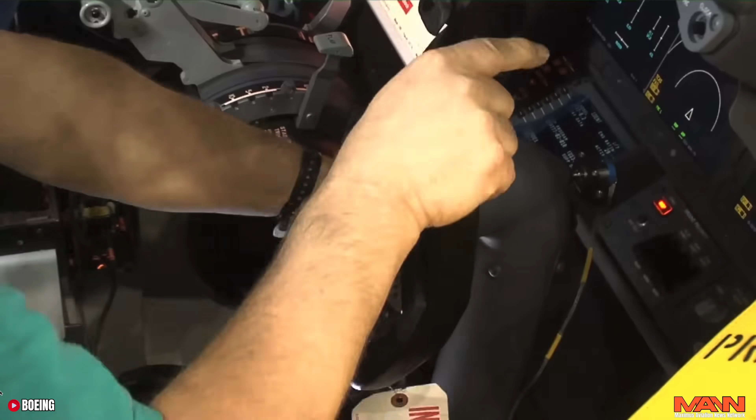So as some of you may or may not have heard, back in February of this year, a United Airlines Boeing Frankenmax Flight 1539, flying from the Bahamas to Newark, had just touched down and began its rollout at about 130 knots or 150 miles per hour. In case you don't know, during landing and takeoff, the main way to steer an aircraft is with its rudders, as opposed to the ailerons via the yoke or side stick while in the air.

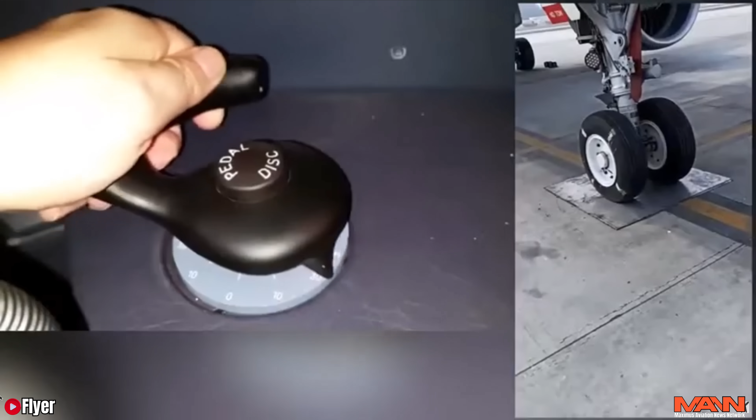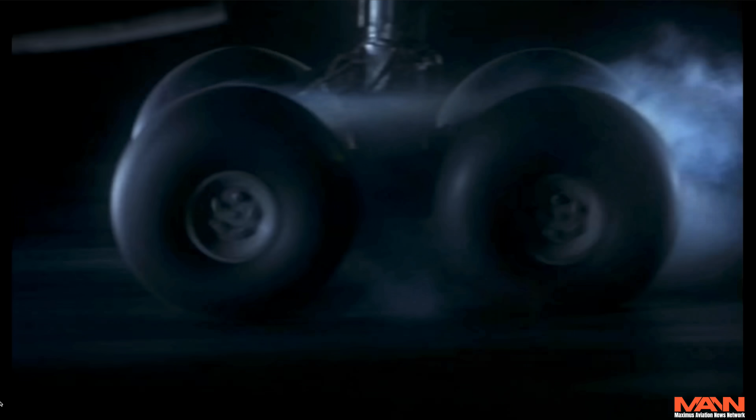But when the MAX pilot attempted to keep the center line during his landing and rollout, he tried to use the rudder foot pedals to move the rudder, but quickly found out that the pedals and the rudder were stuck. Thankfully, the incident didn't cause a serious problem because the captain was experienced enough to immediately grab the tiller, which is usually used to steer during taxiing on the ground, but in this case he used it to steer the jet as it was landing at high speed, and was able to keep the airplane near the center line of the runway for about 30 seconds after touchdown, at which point the pedals and rudder began to operate normally again. However, had this been a less experienced or aware pilot at those speeds, there could have been a serious accident. As a result, it prompted an NTSB investigation, and they released the preliminary report back in March of this year.

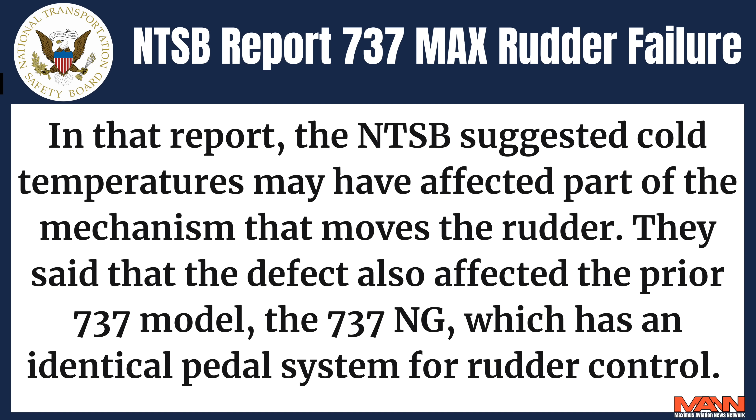In the report, the NTSB suggested cold temperatures may have affected part of the mechanism that moves the rudder. They said the defect also affects the prior 737 NG models, which has an identical pedal system for rudder control. Boeing said it is aware of two similar occurrences of stuck rudder pedals on the 737 NG in 2019, saying that in those earlier incidents a component of the rudder control mechanism was replaced, and both aircraft were returned to flying. Well, I feel safer.

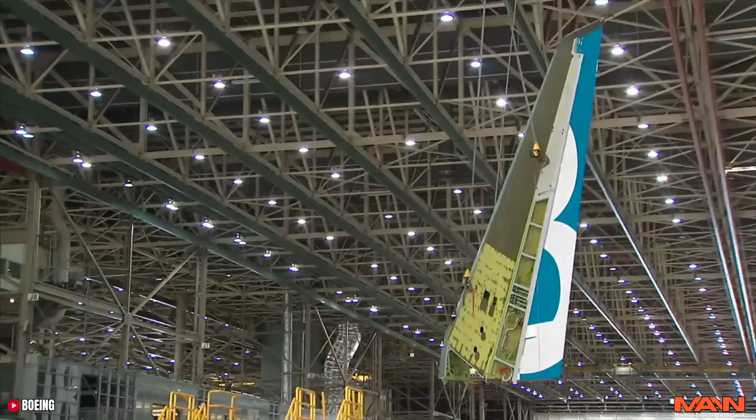Also in March, Boeing announced that in its latest incident, the only occurrence on a 737 MAX, the issue was successfully resolved with the replacement of 3 parts and the airplane was returned to service last month. Oh goody, so I guess Boeing fixed it. Well, that's the end of the video. Thanks for joining me, I'll see you next time. No, of course that's not the end of the video. This is Boeing we're talking about here.

So also back in February, the NTSB investigators reviewed the flight data and corroborated the pilot's experience. Despite increasing force inputs to the pedals, the rudder didn't move. Also on February 9, after the incident, United took the same plane up in the air for a test flight, and it was able to duplicate the system malfunction in the air. Yeah, did you catch that detail? In the air, not on the ground. So the flight test was discontinued, but the jet landed safely.

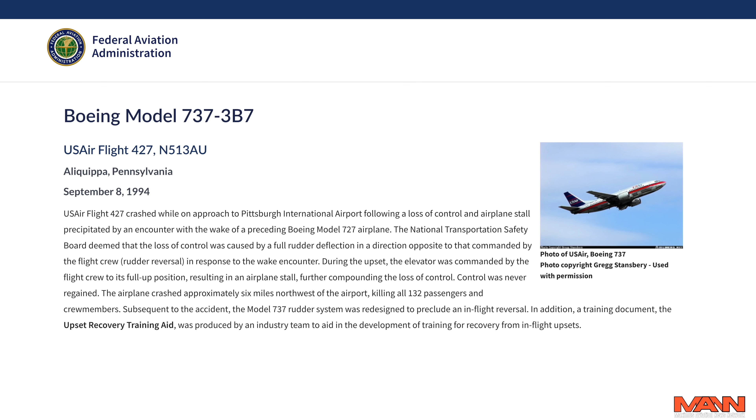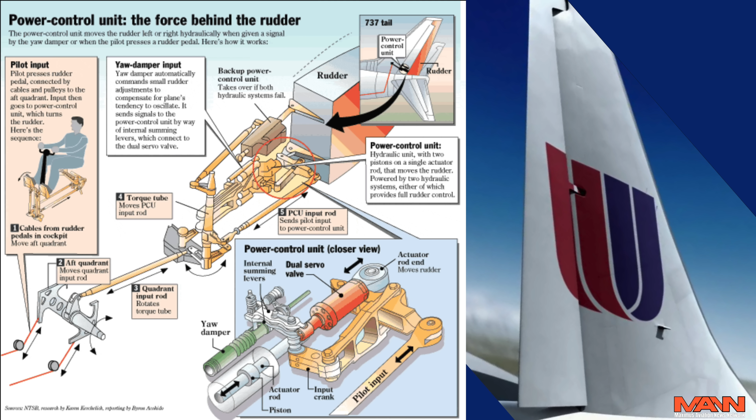So if the 737 rudder problems sound familiar to you, well they should, because there were 2 highly publicized fatal 737 accidents in the 1990s. United Flight 585, which crashed in Colorado Springs in 1991, killing all 25 people on board, and a US Air Flight 427 that crashed near Pittsburgh in 1994, also killing all 132 on board. Both those crashes occurred when a system malfunction caused the rudder control power unit to jam and the rudder to fully deflect to one side mid-flight, a condition known as rudder hardover. So you can imagine why the NTSB was quick to get involved in this later rudder failure.

Back in late February, the NTSB tracked a defect to a servo motor that controls the rudder, and they tested this servo at a Collins test facility in Cedar Rapids, Iowa. Collins is the manufacturer of the part. During that test, they discovered that while it operated normally at room temperature, after a 1-hour cold soak, the movement of the servo's crank arm that connects to and operates the mechanism was restricted. This would prevent the rudder pedals from moving, as observed during Flight 1539 and also on the test flight.

Fast forward about 8 months to the end of September last week, when the NTSB finally issued an urgent safety recommendation to Boeing and the FAA about the faulty rudder servo. The FAA said United was the only U.S. airline flying planes with the manufacturing defect in the rudder control system, and that United has already replaced the component on 9 737s, the only jets in its fleet where it was identified and faulty. However, the NTSB alert said it may cause the grounding of some 737 MAXs and older model NGs flown by foreign air carriers that have not yet replaced the defective part.

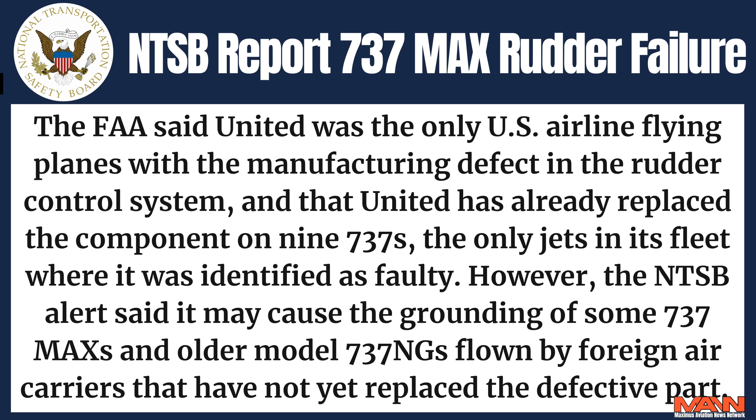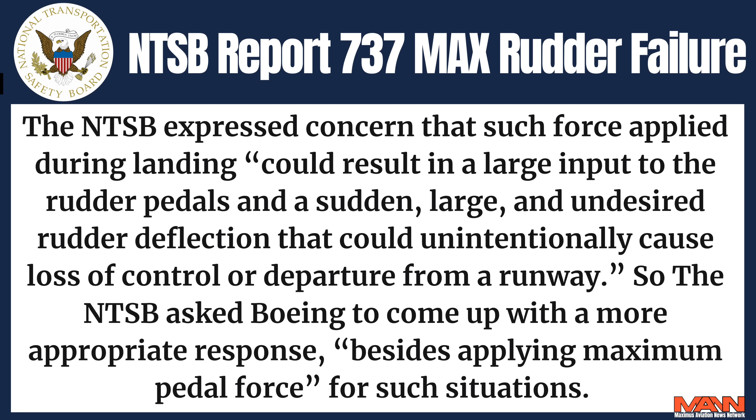In their alert, the NTSB also urged Boeing to come up with better instructions for pilots as to how to handle the rudder jams. Boeing's 737 flight manual tells pilots to overpower the jammed or restricted system using maximum force, including a combined effort of both pilots. However, the NTSB expressed concern that such force applied during landing could result in a large input to the rudder pedals and a sudden large and undesired rudder deflection that could unintentionally cause loss of control or departure from the runway. So the NTSB asked Boeing to come up with a more appropriate response besides applying maximum pedal force for such situations. Of course, Boeing said it will ensure flight crews have the appropriate operating procedures.

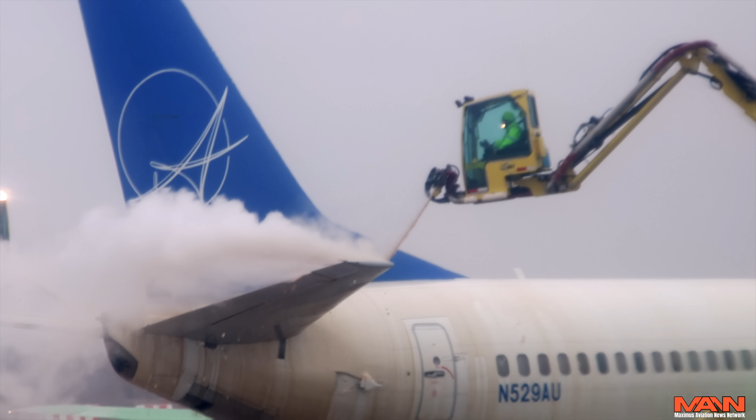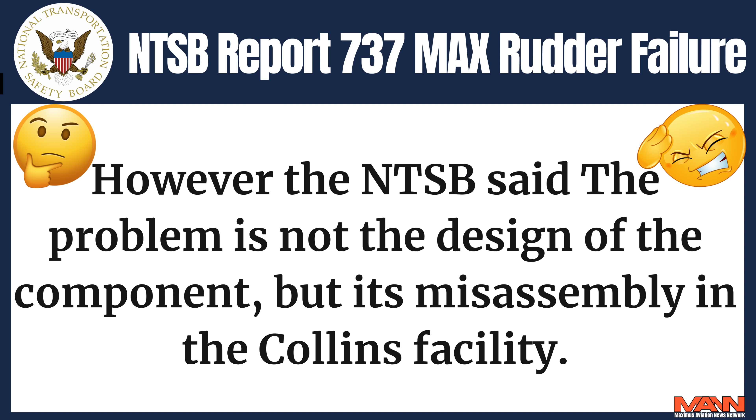The component that failed, the rollout guidance actuator, is made by Collins Aerospace, a unit of aerospace giant RTX, formerly known as Raytheon. In addition to being compromised by cold weather, investigators also found evidence of moisture inside the actuators. Collins later determined that a sealed bearing was incorrectly assembled during the production of the actuators, leaving the unsealed side susceptible to moisture that can freeze and limit the rudder system movement. However, the NTSB said the problem is not with the design of the component, but the misassembly at the Collins facility. Misassembly. Well, isn't that a big word for screwed up?

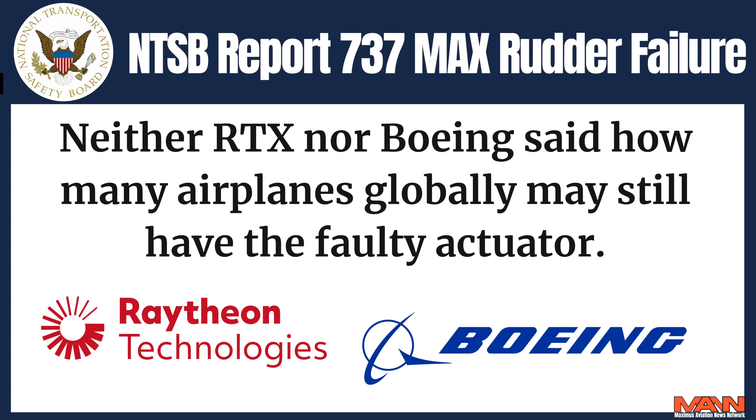Collins subsequently notified Boeing that it had delivered more than 353 actuators with this defect since February of 2017. For those of you into math, that was 7 years ago and 1 year before Boeing's other faulty part, the MCAS system, brought down 2 brand new Franken Max jets. Of those, 25 737 actuators originally were registered to U.S. operators, though 16 of those subsequently were leased to foreign carriers. The remaining 9 were installed on United 737s, and of course, RTX said in a statement that it is working closely with the NTSB and Boeing, and is supporting airlines operating 737s to mitigate the impact. Neither RTX nor Boeing said how many airplanes globally may still have the faulty actuator.

So now, fast forward to this week and the climax of today's video. On the heels of last week's safety bulletin, the NTSB sent a letter to FAA Chief Mike Whitaker criticizing the FAA for their lack of response to the risk and Boeing for not fully informing airlines in advance about the system that had failed. In an unusually strong public rebuke, NTSB Chair Jennifer Homendy expressed concern that the FAA did not take the issue more seriously after the United Airlines 737 MAX incident in February. Homendy added that she's disappointed the FAA did not take urgent actions to address the risk of jam rudder controls after the NTSB's preliminary report on the incident was released 6 months ago.

Equally concerning, Homendy said that Boeing did not provide detailed information about the component that failed to United Airlines when it delivered the 9 MAX aircraft to its fleet. Furthermore, United and its pilots were unaware that this component, an option the airline had never even ordered, was nevertheless installed and mechanically connected to the rudder.

Homendy seemed to imply a parallel with how Boeing actively hid the MCAS flight control system from airlines and pilots. Her scathing letter continued, saying not making operators fully aware of the installed systems and equipment on the airplanes delivered to them is unacceptable and cannot continue to be tolerated.

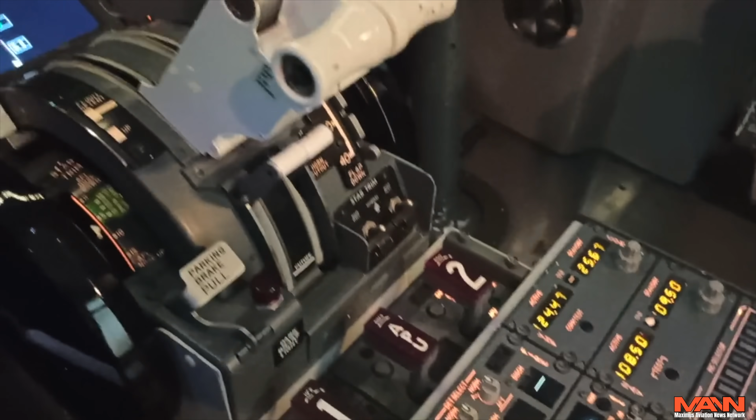And for Boeing, well, Boeing declined to respond to questions about Homendy's letter, citing the ongoing investigation, because Boeing's got to Boeing. The rudder system that failed is only used during Cat 3B auto landings.

However, United doesn't allow its pilots to do Cat 3B auto landings, only Cat 2A landings where the pilots must see the runway no lower than 100 feet above the ground. Consequently, United did not order this system.

So then how exactly did these components end up on United planes they didn't order? Well, United's 9 MAX jets had initially been configured for another operator, and when transferred to United, the actuators were electrically disabled, which Boeing claims it had noted in a 2022 service bulletin to United.

On the United flight in February, even though the Cat-3B autoland system was disabled, the faulty actuator mechanically connected to the rudder jammed. That's why the rudder wouldn't move when the pilot manipulated the foot pedals.

But the NTSB said Boeing failed to inform United that the 737 airplanes it had delivered to the airline were equipped with these actuators, and that the actuators were mechanically connected to the rudder control system. Moreover, only on May 6, three months after the United incident, did Boeing provide instructions that allowed United to permanently remove the rudder rollout guidance actuators from its 737s.

The NTSB boss said, 'We're concerned of the possibility that other foreign airlines are unaware of the presence of these actuators on their 737 airplanes. Consequently, their flight crews may not know what to expect if the rollout guidance actuator fails at low altitude or during landing.'